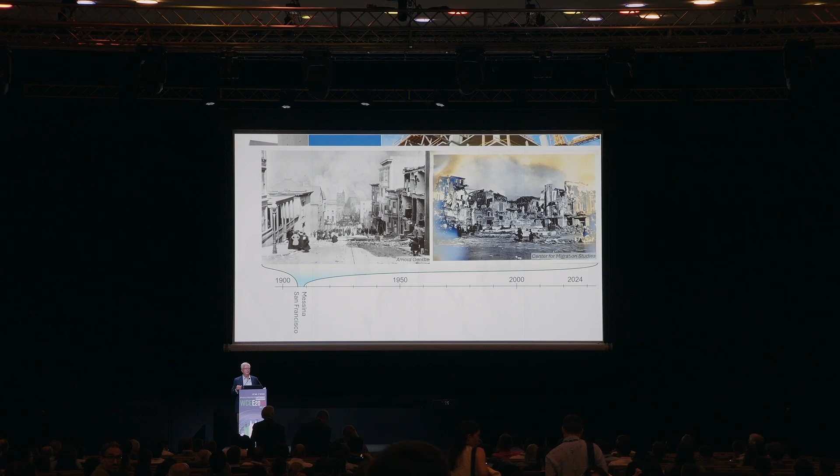First, I want to set the stage. George Housner once wrote that earthquake engineering was really a 20th century, and now a 20th and 21st century, development. And we might think about that development starting perhaps in the beginning of the 20th century with the 1906 San Francisco earthquake, partially pictured on the left. It was an earthquake of many dimensions, with lessons to be learned in seismology, geology, geotechnical and structural engineering, emergency management, and societal aspects. It was everything earthquake because of its extent.

I'd like to point out one individual, Toshikata Sano, who was sent to San Francisco by the Imperial Earthquake Investigation Commission from Japan to investigate the effects on structures. One of the interesting things he came away with, after studying overturned objects, gravestones and other things, was that it appeared, based on simple overturning static mechanics considerations, the peak ground acceleration was somewhere around 0.1 to 0.25 g. Later on, as he wrote his dissertation at the University of Tokyo, he came to the conclusion that for building design, a base shear of about 0.1 g was about right.

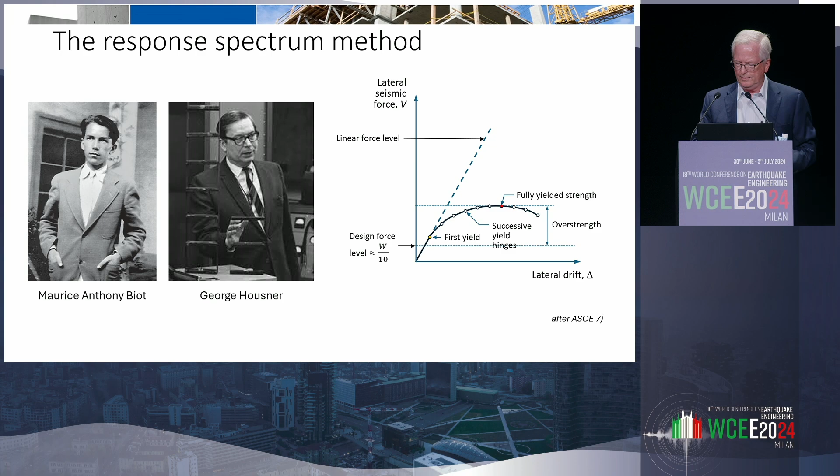Bringing this forward to where we are today, at a World Conference on Earthquake Engineering, we started the conferences on earthquake engineering in 1956. The First World Conference was held at Berkeley, and there has been a conference every 4 years since then. Throughout that period, this notion that the base shear could be somewhere around 1/10 of the weight of a structure for success has persevered as perhaps one of the longest lasting, most persistent ideas in earthquake engineering, but less and less so as we learn more and more about the subject.

Now, some interesting coincidences: 1956 was the year I was born. The first earthquake conference happened to be in Berkeley. I wasn't there then. But among the 5 easy pieces I want to talk about, the first one occurs in 1980, the year that I arrived at UC Berkeley, during the 7th World Conference on Earthquake Engineering. The other 4 pieces are listed here with some brief titles so I can identify the activities that were going on related to those things. In that 5-decade period, there are these 5 pieces that I want to talk about.

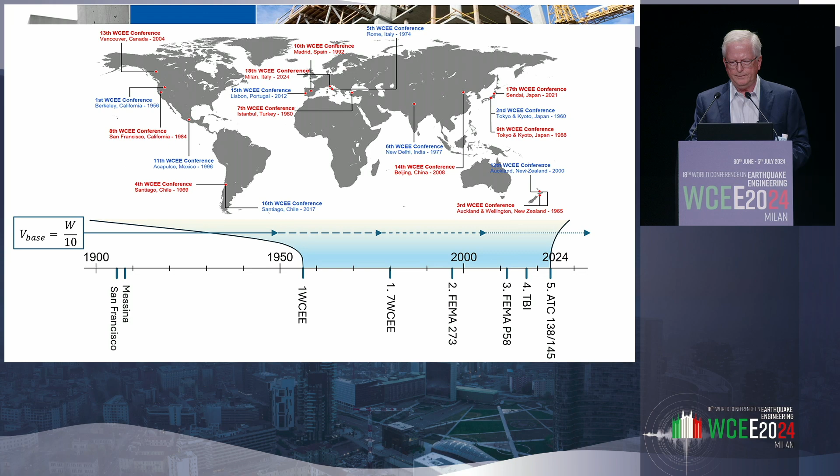So let's start on the first one. The first piece I want to talk about is displacement-based design. The paper was presented by Mete Sozen at the 7th World Conference on Earthquake Engineering, 1980. You can see a picture of the first sheet of that paper. It was titled 'Review of Earthquake Response of Reinforced Concrete Buildings with a View to Displacement Control,' or drift control, actually, that he wrote.

Pictured on the right is a photograph of a test structure on a shaking table. Professor Sozen is the handsome fellow in the middle. The fellow just to his right, the scruffy person, is me, as a graduate student. We were standing on the shaking table for a publicity purpose, to get a photograph to show what it was we were testing, what we were doing. That test model was being pulled toward the right by a cable up at the top. We were looking at the static response of the system under rather large forces. Eventually, one of these versions collapsed onto the table. They were different times—we were a little less concerned about risk on these tables.

The shaking table there was 12 feet square, or a little over 3 meters square. It moved only in one horizontal direction. It was very limited, but it became the workhorse for Professor Sozen and the way he started thinking about displacement-based design.

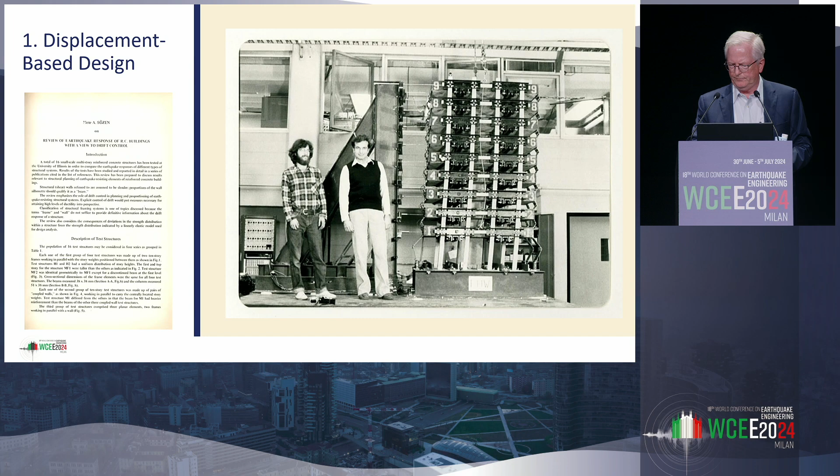Sozen tested a series of progressively more complicated structures. Here's just a small sampling of what some of these structures look like. Some of them eventually became smaller in scale, so they would fit on this small table. Sozen wisely stayed away from problems associated with bond and anchorage failure and shear failure, because those kinds of things cannot be modeled in a small scale specimen like this. But flexure is relatively safe for modeling purposes.

One of the things that Sozen wrote about in this paper was the fact that these structures cracked, yielded, they were clearly damaged, they responded in the nonlinear range of response, and yet they had characteristics very similar to response characteristics for linear structures.

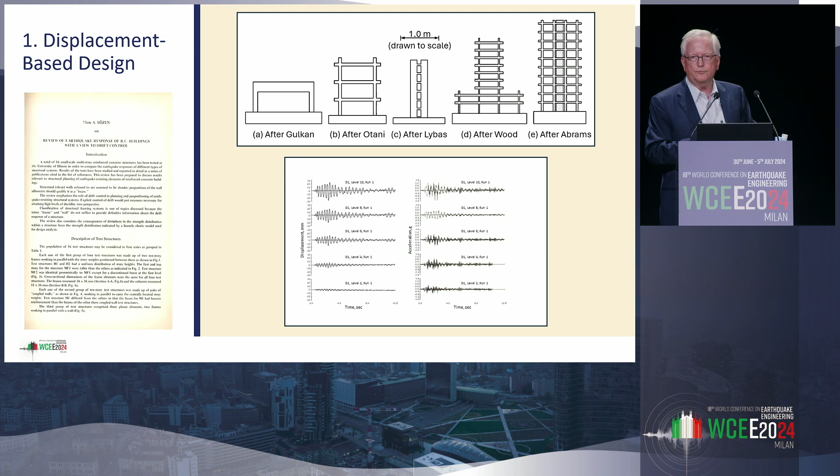If we look at a set of waveforms on the left, those are displacement histories for a test structure. The waveforms are relatively smooth, like linear structures. The displaced shape is like a first mode shape. You don't see a lot of higher mode.

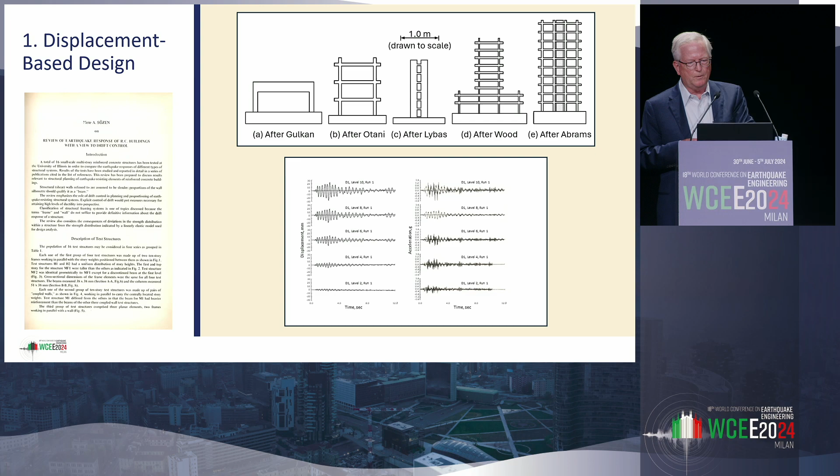Looking at acceleration responses, one can start to find similarities for multi-mode response, including the presence of nodal points and various other things. Sozen also started noticing characteristics of the drift amplitude that he could start calculating, and he was continually focusing on this idea, trying to think where it could lead.

As testing went along, this is actually a photograph from a little bit earlier, 1968, showing Sozen, the fellow standing. The fellow kneeling down on the shaking table is Shun Otani, who later had a magnificent career of his own at the University of Tokyo. The fellow to the right of the shaking table, kneeling down and looking, is Polat Gulkan, who has had a long association with the IAEE and METU in Turkey.

One of the things they got to looking at here was the load displacement hysteresis relationships of simple reinforced concrete structures on a shaking table, noticing the characteristics of the shape of the structure. Thinking in terms of the left figure about how the stiffness varied as a function of lateral drift, how that reduction in equivalent stiffness might be used to estimate drift demand through nonlinear results. On the right-hand side, some results from shaking table tests as well as sinusoidal motions, extracting what was the equivalent damping from the system as a function of the displacement ductility of the system.

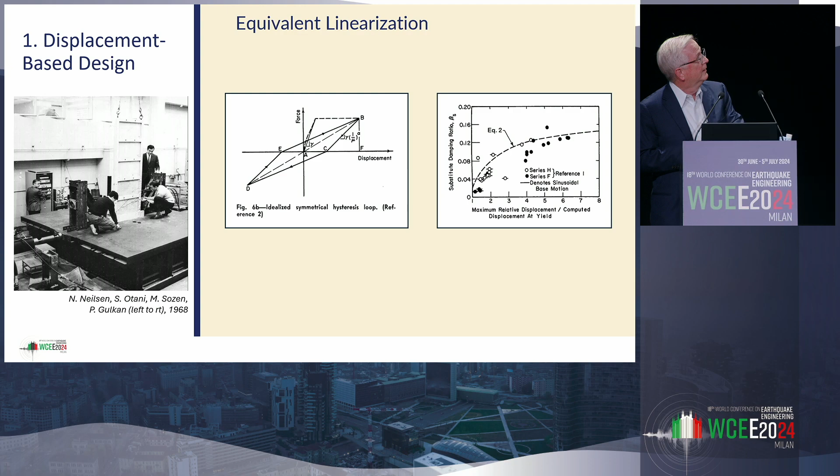This different way came out in a paper in 1973 at a workshop held by the National Science Foundation. In this paper, Sozen writes about a different approach to the earthquake-resistant design of reinforced concrete structures, and he flips the idea. Rather than using the structure and the equivalent linearized properties to estimate demand, he says, let's flip this.

Let's think about first assuming there's a tolerable displacement expressed as a multiple of the yield displacement, and you pick that displacement based on how much damage you think is acceptable. So you start with the idea that you want to control the damage, you pick the displacement, determine a reduced stiffness of the frame, step 2, find a period, find an equivalent or substitute damping based on what Gulkan had been working on, enter a linear response spectrum with the period and the damping, and get a base shear out of it.

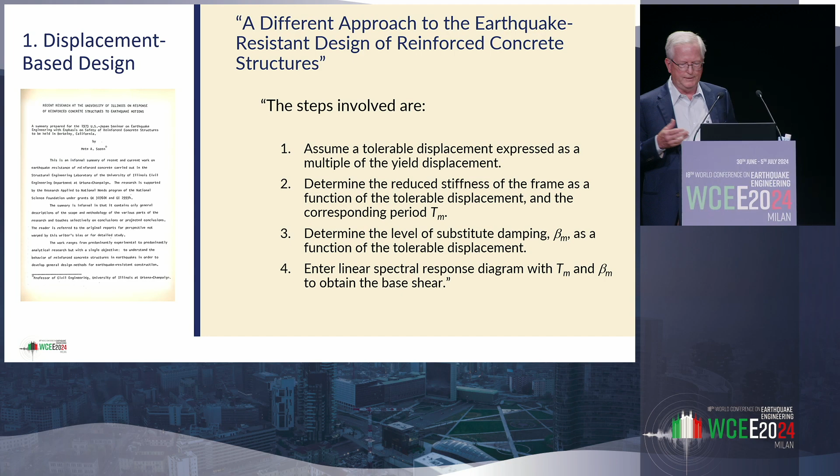He tried various schemes of this type. This eventually came out, published as work that Professor Gulkan and Sozen had in papers in the ACI Structural Journal. It entered into the thinking about a substitute structure design method. In effect, this is really the direct displacement design method—not quite the same as it might be done today, but the idea of starting with the tolerable damage and working backwards to figure out what the structure should be was a huge insight, a very different way of thinking about this problem at the time. I think it has to be attributed almost entirely to Sozen.

Now, why was Sozen interested in displacement as opposed to forces? What we had before was you get a base shear, 1/10, 1/12 of the weight of the structure, or something more complicated than that. Sozen's interest really came out of his experience in earthquake reconnaissance, looking at damage, and his experience in the laboratory looking at how damage develops in structures as they're moved.

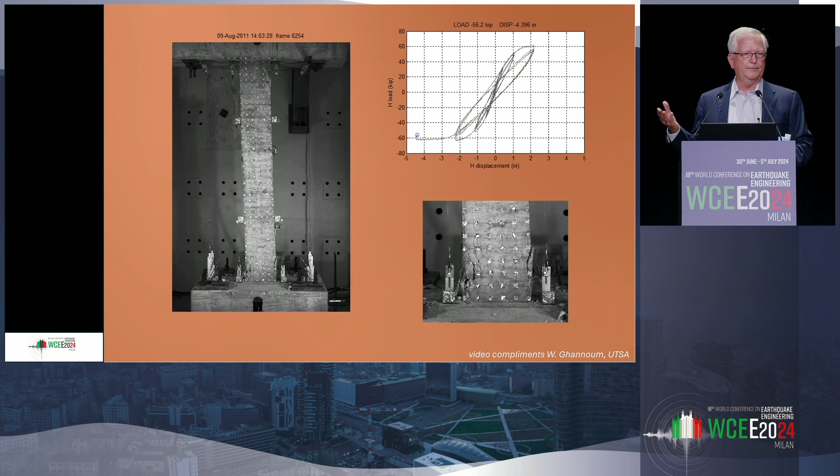Watch this video if I can get it to run. There it goes. This is a column subjected to axial force and cyclic lateral loading, effectively linear at this point, cracking, beginning to yield soon. We'll let this run a moment more. Much more extensive yielding. The force resistance of this simple column is determined by the longitudinal reinforcement, which establishes the moment strength.

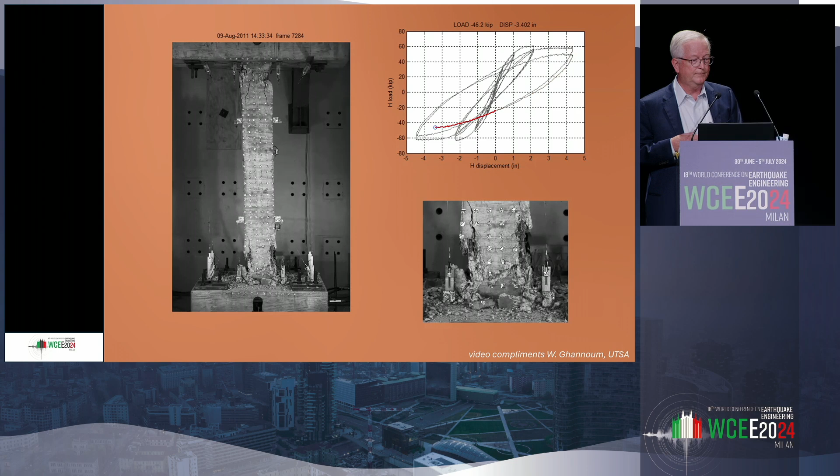Provided the structure doesn't fail in shear or bond or anchorage, and provided it's pushed into the nonlinear range, the shear force that it's going to develop is determined by the moment capacity. And it's not that shear force that fails the column. What fails the column is the deformation and the repetition of large displacement cycles that cause damage and eventually lead to failure.

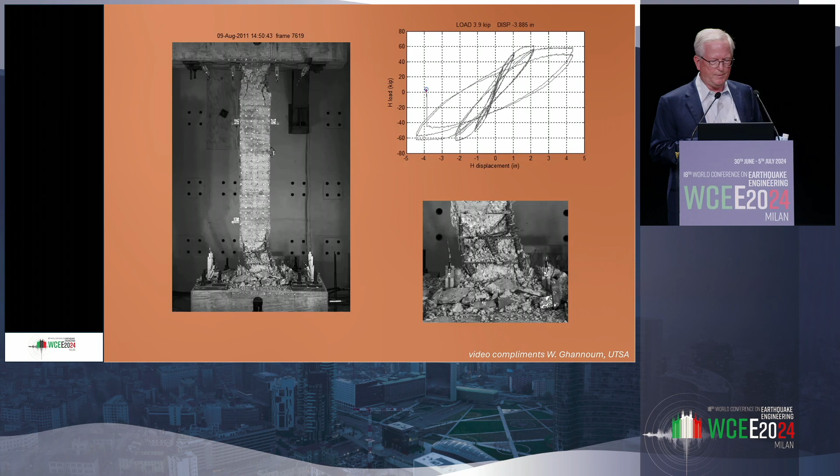Sozen's interest initially was primarily in the structure, trying to establish how to control displacement to control structural damage. He was also interested later on in the non-structural parts—how do you control non-structural damage by controlling displacement? It was a very different way of thinking about things at the time.

The drift committee, if I can find my notes here, said that safety, of course, was important when considering drift. So if you had elements that would get knocked out of place and fall on people and kill them, those had to be addressed. But beyond that, non-structural items and discomfort of occupants were not to be part of a building code because they demonstrated excessive paternalism.

Paternalism, if you're not familiar, it's a complicated English word. It more or less means excessive control by the government of things that people really should be able to decide for themselves. And so Sozen, I think, got a kick out of that statement.

He himself never, as far as I know, nailed down or specified or recommended a particular drift that you should use, but maybe a range within which to work. So he was not into setting himself up to be criticized for what he selected.

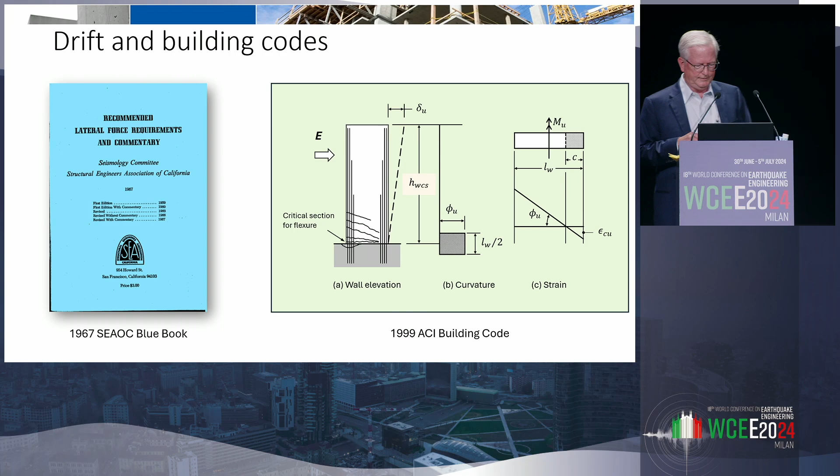I want to close on this first piece, and I could spend all day on it. But Sozen had a big team of students over many years, and I credit that team with shifting the focus from forces into displacements as a preferred means of identifying damage and design requirements. The concept of relating performance and displacement, and picking displacement as a way of deciding if a design is good, today pervades methods of performance-based earthquake engineering. And while Mete Sozen tended to disparage the notion of performance-based engineering every time I spoke with him, he really, I think, gets the credit in my book for getting us moving there. So that sets the stage that I wanted to start with.

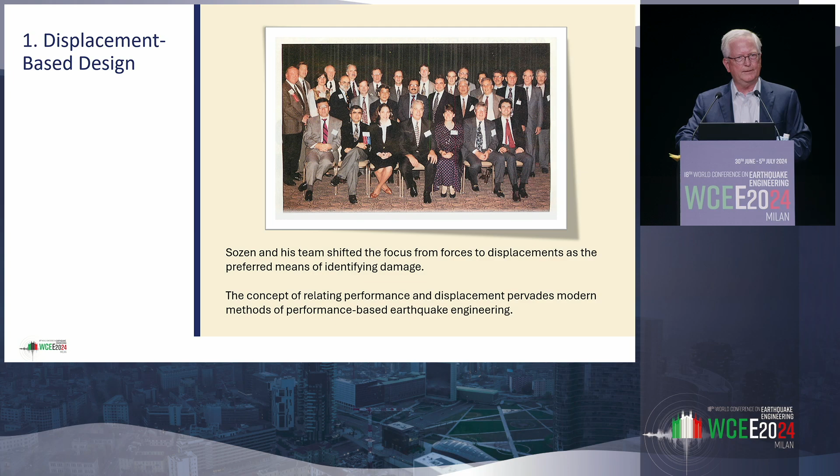The second of the 5 easy pieces is one related to existing buildings and the assessment of those buildings.

I wanted to point out first that in California, in the period of 1971 to 1994, there were many damaging earthquakes. There was a lot of shaking going on in California at that time. And those of you who are from California and young, get ready—it'll start up again sometime soon. Be prepared. But this was a very active period.

We learned from those earthquakes that most modern buildings perform reasonably well. They did what they were expected to do. They were pretty safe. But many of them sustained damage that was not adequately controlled, mainly in non-structural systems. So that was a consideration that needed more attention.

The existing building stock, on the other hand, was another story. There was a lot of damage that occurred in existing buildings at the time. Owners began to be more aware of the problem of existing buildings. Many owners contacted engineers to look at buildings and start thinking about strengthening them. The word was strengthening at the time.

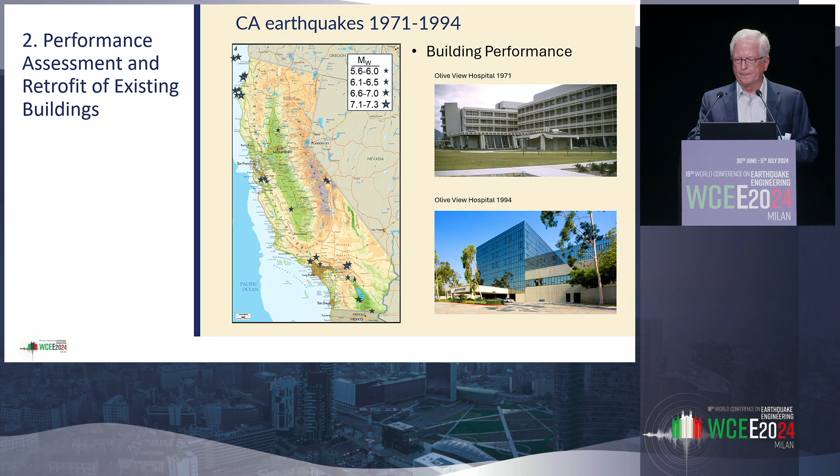Given the work that Sozen and others had been doing, there was awareness in the structural engineering community on the west coast of the US that displacement mattered. The original idea of seismic strengthening was that if the strength was less than about 3/4 of what the modern building code required, you added more strength to get it up to that minimum level. The thinking began to change around the early 1990s toward displacement-based ways of controlling damage.

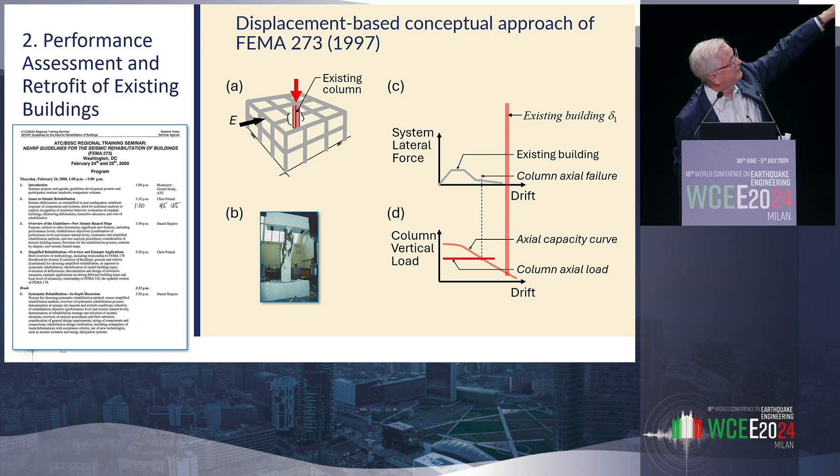We've got that vulnerable column. The lateral force resisting system is weak—it doesn't provide enough resistance to control displacements. In D, the column may be pushed beyond its shear capacity, or beyond a capacity where it can continue to support vertical loads. The key to retrofitting, in providing a supplementary system, is to bring the drift back.

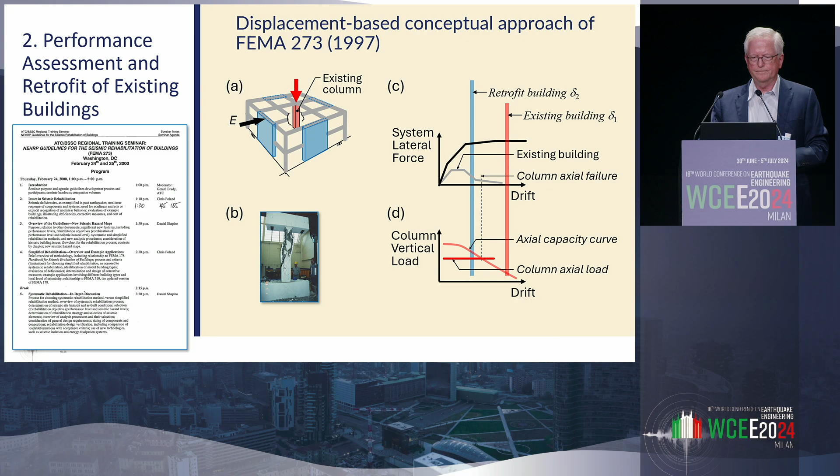This seems routine today, but in 1991 or '92, this was not routine. This was not the usual way of thinking about retrofitting, repairing, and rehabilitating buildings.

FEMA, the Federal Emergency Management Agency, recognized the issues of existing buildings and started a program in the 1980s that really kicked off with the development of a document, FEMA 273, with a set of guidelines for the seismic retrofitting of existing buildings. Here are some of the key team members involved in the project—many of them I think of as real masters of earthquake engineering who deserve to be invited soon to this stage.

Ron Hamburger, in one of the presentations early on in the project, presented this slide during a talk at an East Coast university. This slide became the poster child, in a sense, for the project, and it shows a number of interesting things. One was the notion that there would be multiple performance objectives that one could choose.

One could choose something related to a 25-year shaking level and a different performance level, versus a 2,500-year return period, for which you might consider being on the verge of collapse. So this idea of performance objectives, with both demand and performance level considered, was kind of new.

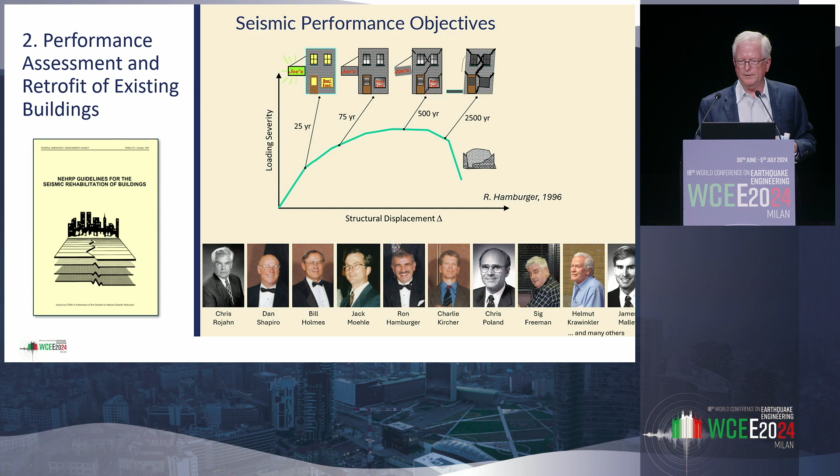The response is definitely non-linear, which was fairly new at the time. And the idea of being very visual in presenting these different objectives, so you could explain to property owners who wanted to know what they were getting when they asked what they'd get for the amount of retrofitting being proposed, was very important.

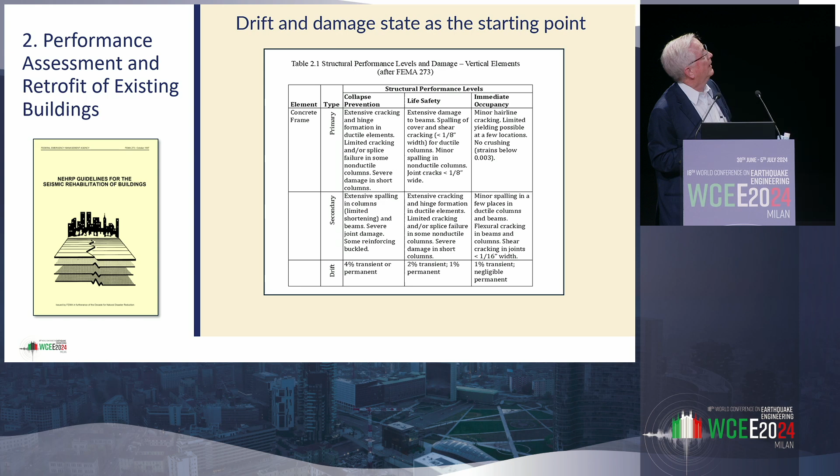I think for the first time, this committee went to work on trying to define what each of those limit states really was about. Shown here is part of one of the tables from the FEMA 273 document. For concrete frames, if they're a primary part of the lateral force resisting system—meaning they're supposed to resist the earthquake shaking primarily—for collapse prevention, life safety, etc., this is what that team decided was the right set of performance levels and how to describe them.

Once the levels were described, the team had to select ways of delivering a building that would achieve that. So there was discussion and provisions developed related to global modeling, how to do a global model. For the first time in US practice, there was very explicit consideration not only of linear modeling, but non-linear modeling and analysis methods, both static and dynamic.

For each component type, models had to be developed and described. You had to understand the deformation limits and criteria needed. And for each of those components, criteria were needed to help define whether they were force controlled—unable to yield without failure—or deformation controlled, meaning they had the capacity to deform non-linearly without failing.

For those different kinds of components, criteria were needed for strength, for stiffness, and something totally new for the time: how to define the deformation capacity of a component that's yielding. A totally new thing.

Not that we didn't know it was needed, but we didn't ever have criteria for that. Now I want to pause for a moment and reflect on the fact that this had a huge impact on practice, on research, and on computer software development. Computer software development—we needed software that could do this kind of work, and the software companies stepped up and delivered that. We needed to understand criteria for...

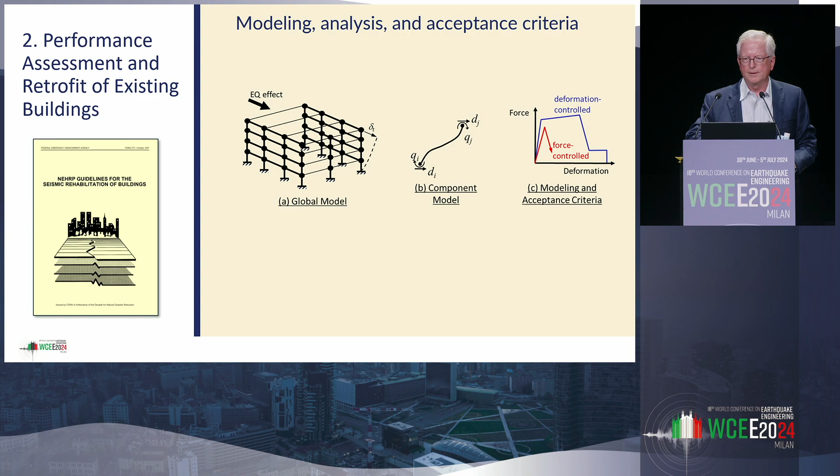These procedures were very widely used. The Berkeley campus is one example of sort of a retrofitting museum, so to speak. But we can find structures all over the United States that have been retrofitted by these procedures, and we think they've been very effective.

One thing I didn't mention is that while we had performance objectives, they were really notional, in the sense that we could state a life safety criterion, but we didn't actually calculate a risk of not achieving that criterion. That was just too much to do at the time, and more time and more research was needed to take that next step.

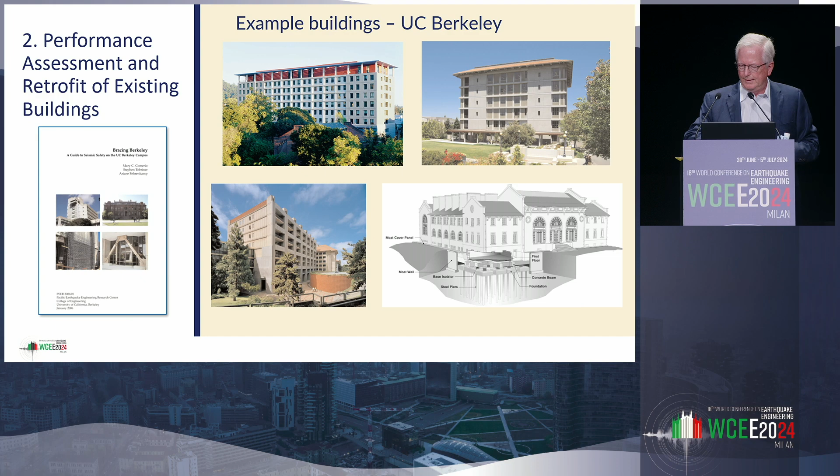And that gets me to my third piece in the five easy pieces. Right about the end of the development of FEMA 273, it was apparent that we needed risk-based procedures.

We know that there's uncertainty in earthquake ground motion, in structural response, in the occurrence of damage, in the amount of time it takes to fix damage, and so forth. But it was a huge undertaking to figure out how to do that.

We adopted Ron Hamburger's cartoon, updated the structure a little bit so we could call it our own in the Pacific Earthquake Engineering Research Center. Bill Holmes from Rutherford and Chekene came to one of our research meetings and gave a presentation and told us we needed a performance engine that would be able to calculate not just serviceability states and life safety states and so forth, but would be able to tell us the cost for repair, the casualty rates, and the downtime.

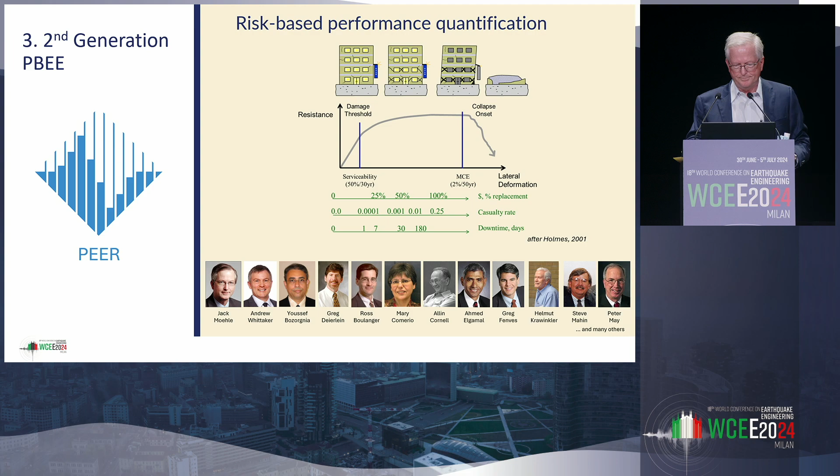We had no idea how to do it in the Earthquake Center, but we had really good people to work with. For example, Helmut Krawinkler and Allin Cornell from Stanford University took on the task of trying to figure out how to formulate this notion of performance—how to actually do a calculation that put all the uncertainties together mathematically and enabled us to calculate the risk of repair, of cost, et cetera.

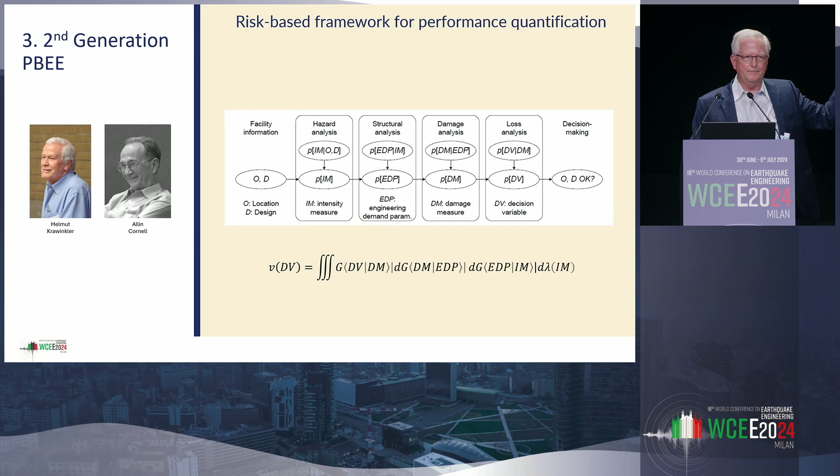Many practicing engineers looked at this and said, 'You've got to be kidding. No way are we going to do anything like that. You academics are nuts.' Peter May, who was a social scientist, looked at the equation and said, 'You're oversimplifying the problem.' And Peter was right. Solving the equation isn't easy, but we figured out ways to do it.

One of the ways it was solved was done in a little project with Tony Yang. I think Tony is here somewhere in the audience.

We were working on trying to figure out a practical way to do the integrations and essentially set up a Monte Carlo scheme. The idea was that given a facility, you did a hazard analysis, you selected some ground motions to represent the hazard, you input them into the structural model, calculated engineering demand parameters like drift and acceleration.

You determined damage from that using a fragility relationship. How does damage of an infill, for example, relate to story drift? You would then do this in a Monte Carlo study thousands of times so you could characterize the distributions of the results. No way you could do it because just the nonlinear analysis at the time, and still today, takes too much computational time, and dealing with the results is just too difficult.

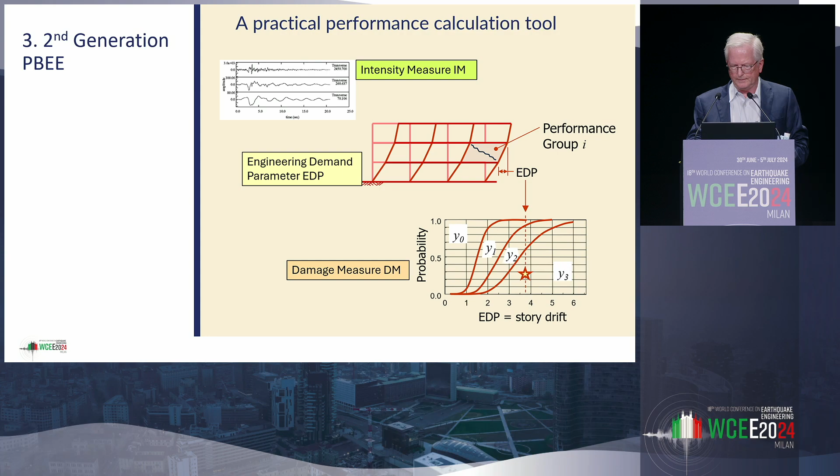So what we schemed was a technique where we did it a finite number of times, a smaller number of times, collected all the engineering demand parameters that were of interest. In this example, we did a 3-story building. We just did 11 ground motions at each of several hazard levels.

And then we collected from that displacements, accelerations, and maybe base shears. And then we looked at that matrix and figured out what was the mean vector for each of those demand parameters, the standard deviation for each one of those, what was the correlation coefficient matrix like.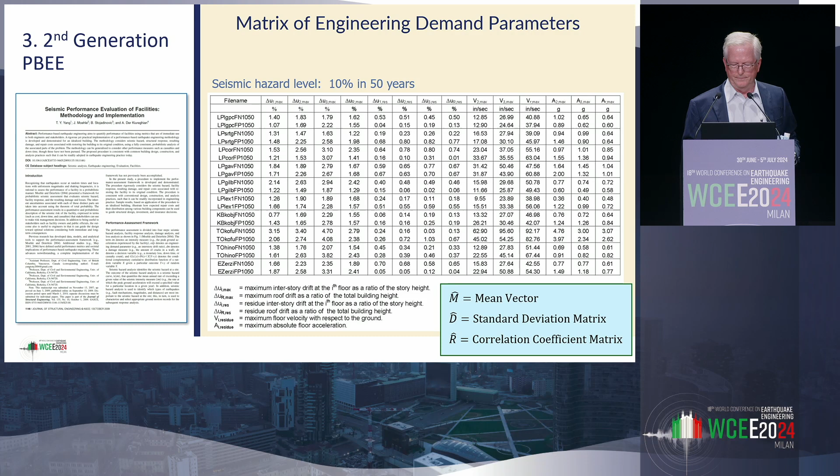So we could mathematically derive through an inverse process a series of demands that was statistically consistent with the results that we got from the nonlinear dynamic analysis. And so we could simulate mathematically the results that we were getting from nonlinear response history analyses. And here's a sampling, here's 10 sample realizations of using a process like this.

The nonlinear analysis could take an hour per run. This took a fraction of a second to do 100 of them. And so with something like this, we could develop realizations of what the earthquake demands were.

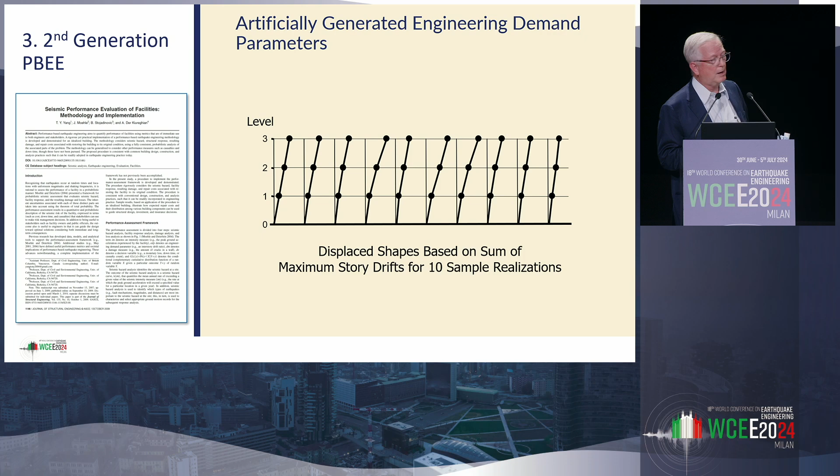And given those realizations, we would be able to do damage calculations, do loss calculations, et cetera, in a probabilistic way, taking all the uncertainties into account, and do it fast.

And in this process, we could do things like calculate the probability of certain repair costs given an input motion. So here's some essentially fragility curves for cost. We could integrate those things and get what was an annual rate of exceeding a total repair cost, and take an area underneath that thing and get a mean cumulative annual total repair cost for a building.

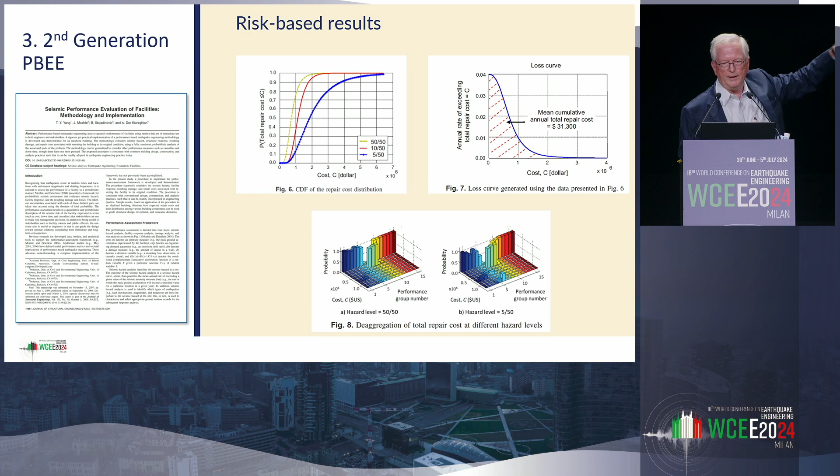Or you could look statistically at how individual components of the building were doing and find out which components of the building were being more heavily damaged than others, and try to find ways of changing the structure, changing the clearances so that you could reduce those losses that were causing most of the cost. It was a fascinating exercise. It was fun to develop and get it to actually work.

This procedure was being developed by the Earthquake Center at the same time that FEMA was involved in another project, which was the FEMA P58 project, to develop the data necessary to determine what the losses were for a building of any general type, with multiple building types being considered at the time.

So there was a big team that worked on this, marvelous people to work with, developing definitions of what buildings were, what were the demand parameters you needed to work on. For each one of those components in a building, what kinds of damage could occur, at what drift levels did they occur, or acceleration levels if they were acceleration sensitive.

What did they look like? What would it cost to repair them? How much time would it take to repair them? And when the information was all assembled with this performance calculation engine that we built at Bill Holmes's suggestion, you could put together almost anything on performance output.

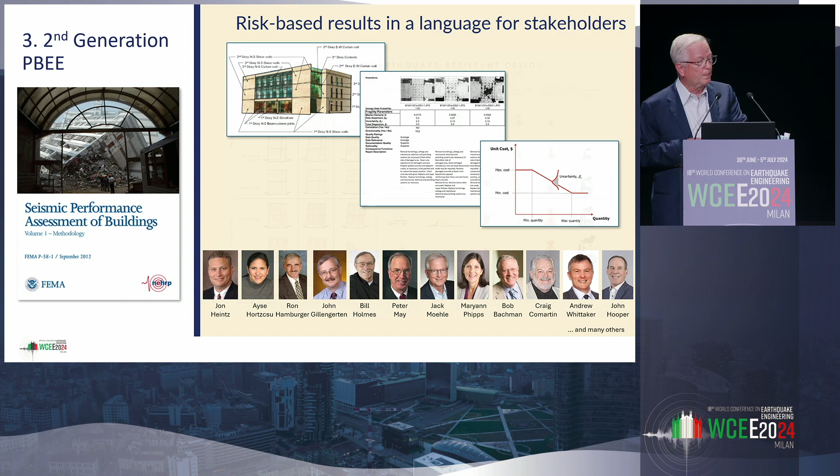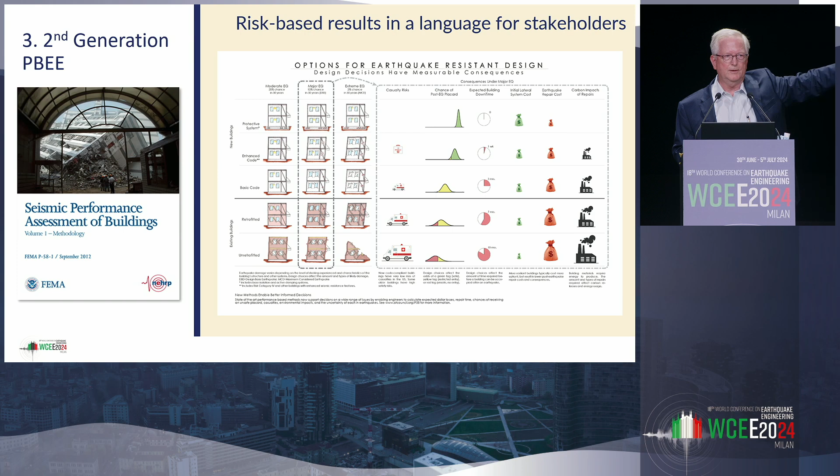And as we were getting toward the end of the project, FEMA says you've got to include environmental costs as well. And once you've got the engine and you start inputting the data, creating fragility relations for all the things you need, this becomes kind of routine.

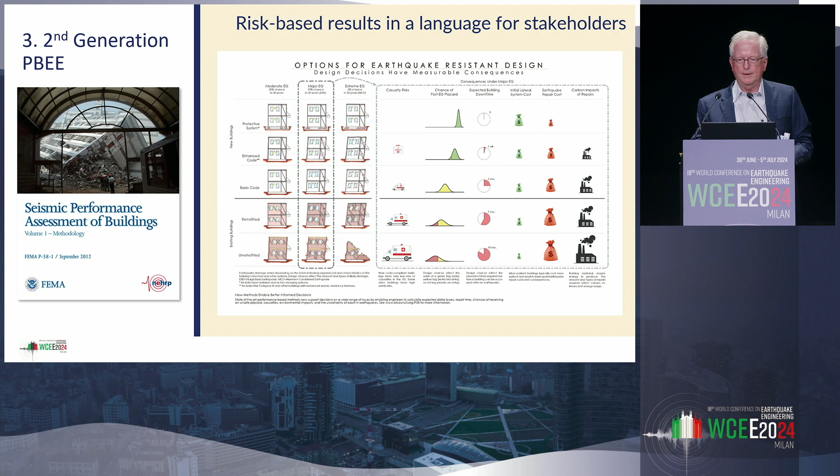So this was really the third, in my view, the third big piece in performance-based earthquake engineering: being able to quantify the risk of being in different damage levels. Now, once we had things like this,

we started working on the problem of design of tall buildings. And there are many other types of buildings that could have been pursued, but there was a particular interest in California and throughout the West Coast at the time in pursuing taller buildings that were a little different from buildings that had been designed before.

And they were outside the requirements of the code, the restrictions of the code. And so something different was needed.

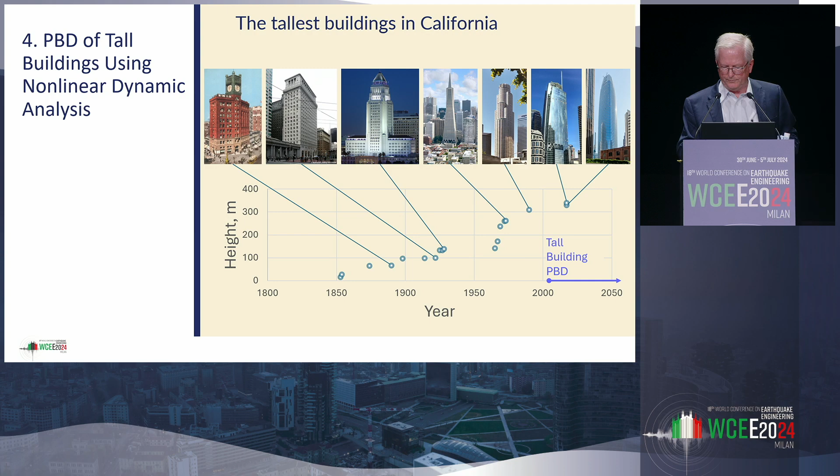The new building generation had different kinds of framing systems, odd geometries and cladding. There were combinations of structural systems within the building that just didn't match anything within the building code, and so we needed a performance-based approach.

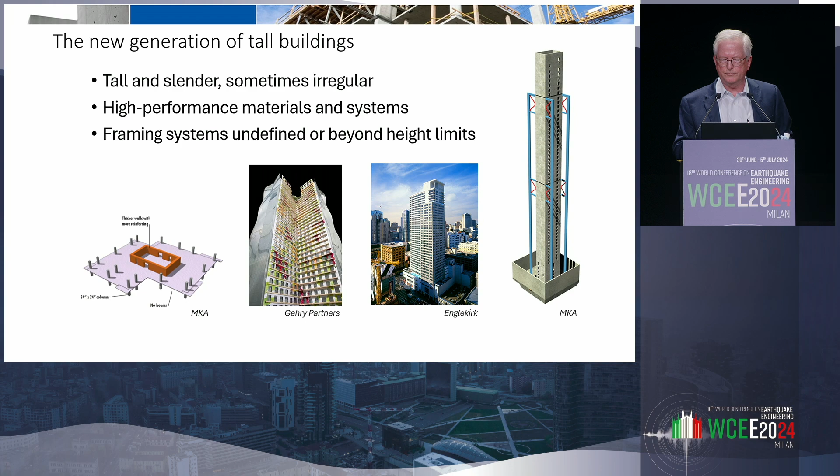Lots of studies were done to try and figure out how to do this. Time doesn't permit going into many of them, but one of the little studies that was done was to do sample designs by practicing engineers of different structural systems and design them by different methods to see what the output was. This example is looking at a 42-story tall reinforced concrete dual system compared with a 42-story reinforced concrete core-only system.

If you designed a core-only system in California at the time, you could only go up to about 15 stories or so. This is going way beyond that, and this then requires a design by a performance-based method. These were designed by two different design concepts: the code as it existed at the time, and then a concept we had, a notion of a design guideline that would allow us to carry out the design outside the code.

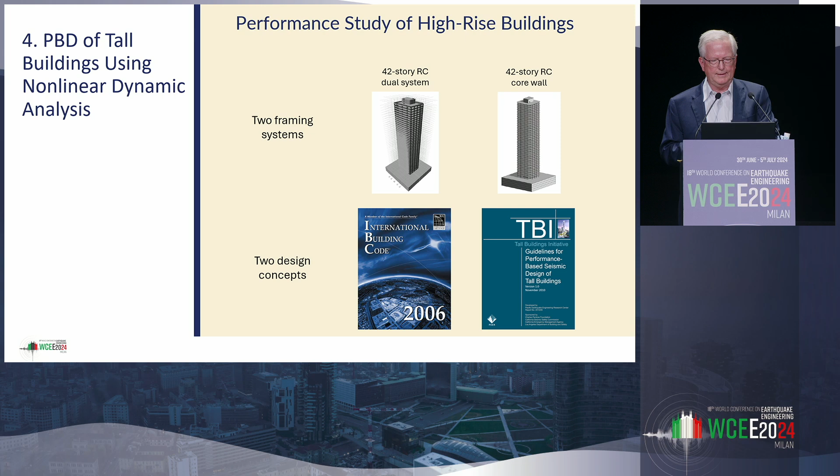Quick to the results. These two systems were designed two different ways. There's the initial cost in accordance with a real cost estimator. And below that was a calculation with this performance tool of what the losses were that we would calculate for each of these buildings.

The base cost, if we were designing only by the code required system, we would have the dual system code design at $149 million US at the time. If we could shift to the performance-based design, we could go to a core wall and it would be a little bit less expensive. But it was something that we could design. It wasn't more expensive, and it had other attributes in terms of functionality that developers were interested in.

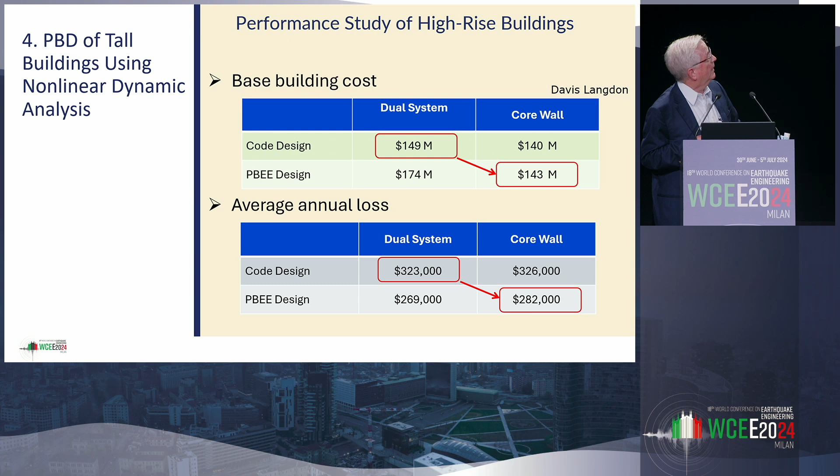In terms of average losses, compare the two: $323,000 calculated for the dual system by the code prescriptive design, with less losses for the core wall system. A lot of this had to do with the losses because of the drift demands on flat plates, but also the shear demands that we would calculate on the core wall system.

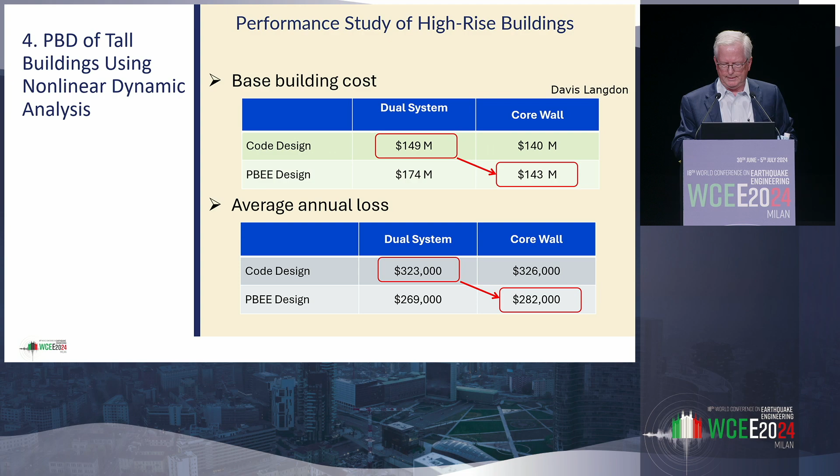So with this in place, what was done was to start the process of writing a guideline that could be used by practicing engineers to implement this for the design of multiple buildings. Farzad, I'm very sorry, I had limited time tonight. I can only talk about the tall buildings guideline and not the LA tall buildings guideline, but there's an equivalent, almost equivalent document in Southern California that gets used.

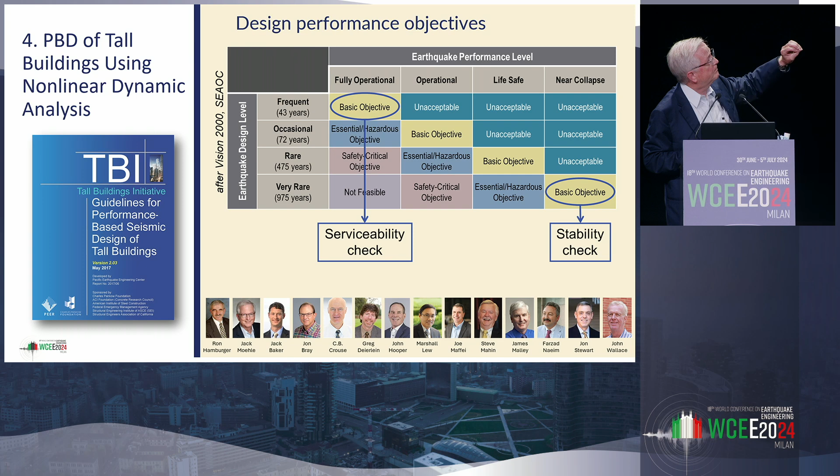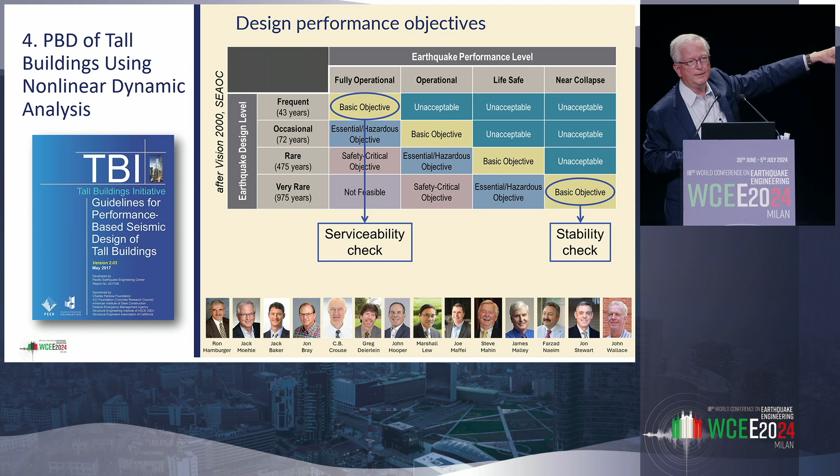It was decided pretty widely within the state that the best way to do the design was by picking a set of objectives for performance: a serviceability check for frequent earthquakes, and a stability check for something that was a very rare shaking level.

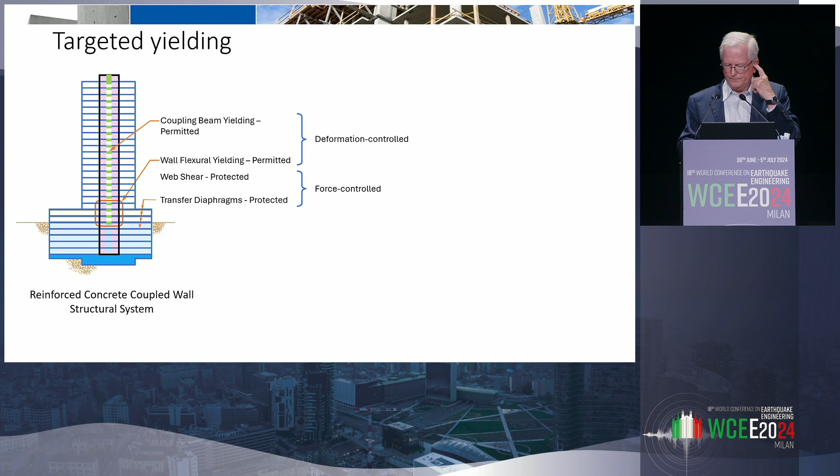The design methods that were used involved specifying that you picked targeted yielding locations and locations that you protected from yielding. The structure was to be analyzed in certain ways with guidance provided on how to do the analysis and what had to be modeled.

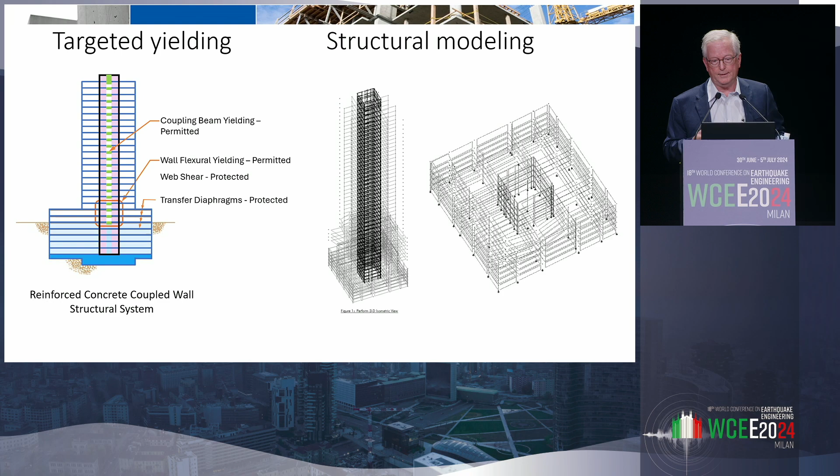There were acceptance criteria developed, and the criteria are a little different in the two different documents I mentioned. But what was typically done is run a series of earthquake ground motions through a model of the building, check drift ratios, deformations in certain deformation-controlled elements like coupling beams, check strain limits against your modeling ability, and then for certain force-controlled elements, make sure that the forces stayed below what the force capacities were.

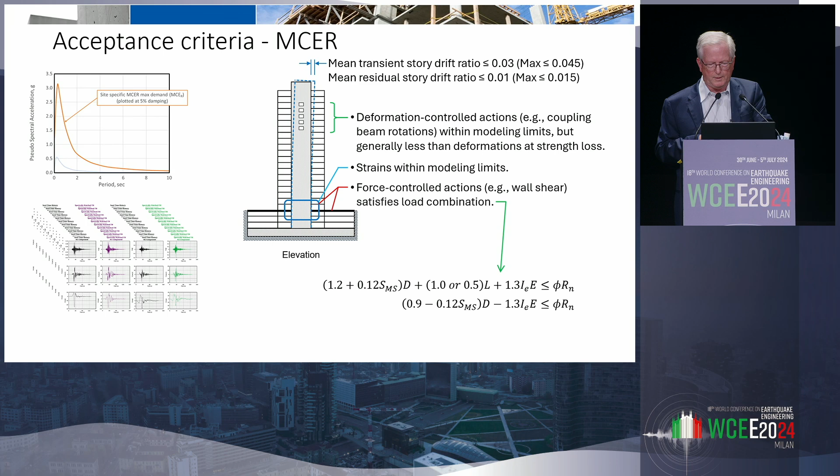And for those elements, there were load combinations that were developed that were intended to achieve the performance objectives stated in our building code: 10% or less probability of collapse in a maximum considered earthquake condition. And the materials code stepped up and developed resistance and strength reduction factors to fill in on the right side of these equations.

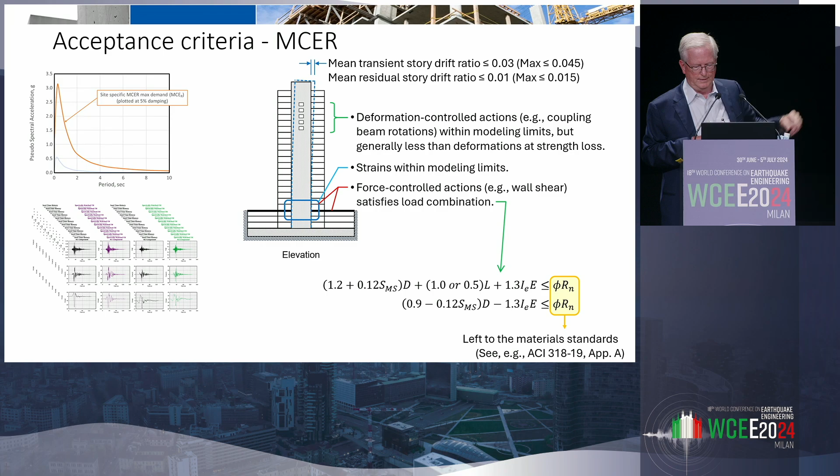These methods were used in many buildings up and down the west coast of the United States. I served on several of the peer review panels and started collecting data quietly on how each of these was performing, at least according to the calculations under nonlinear dynamic analysis.

Story drift under service level earthquakes was pretty small for the most part. Under maximum considered earthquake, the maximum of the mean drifts never got above 3%. It's pretty high though, but 3%. Residual story drifts were generally pretty low because they're core walls.

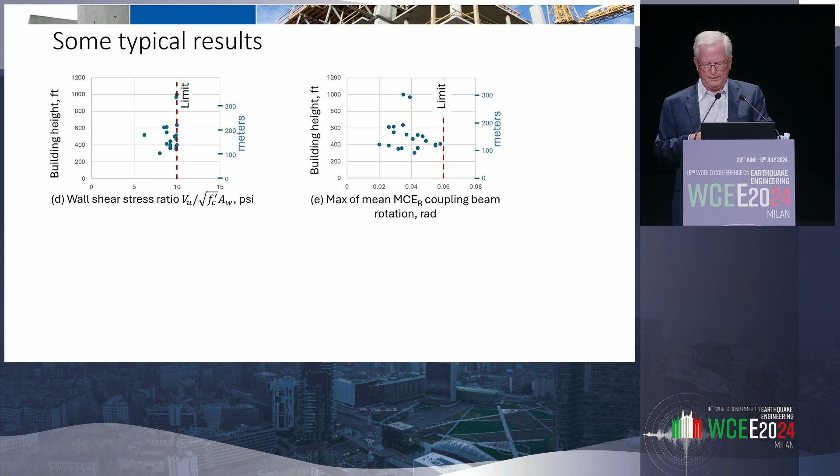Shears on the walls are the item that oftentimes control the design of these buildings. They get pushed up toward what we had established as a shear limit at the time. And then the rotation of the coupling beams can be a controlling factor because the beams are constrained within the rotating walls. John Wallace provided some test results from UCLA based on Pankow Foundation testing to show what these things would look like given that level of shaking.

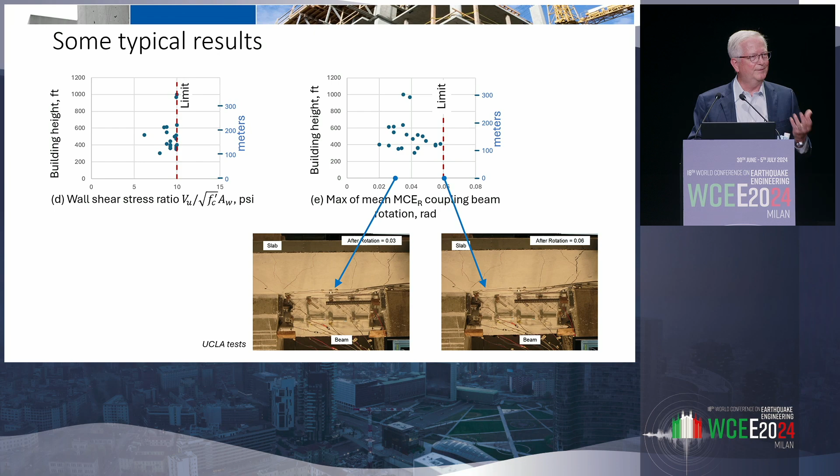It was reasonable, at least within performance states that was considered non-collapse. We generally felt good about this process because we were providing a means to design buildings in a way that was considered effective, efficient, met performance objectives, and provided reasonable assurance for the occupants of these buildings that they could work and live and play in their urban centers.

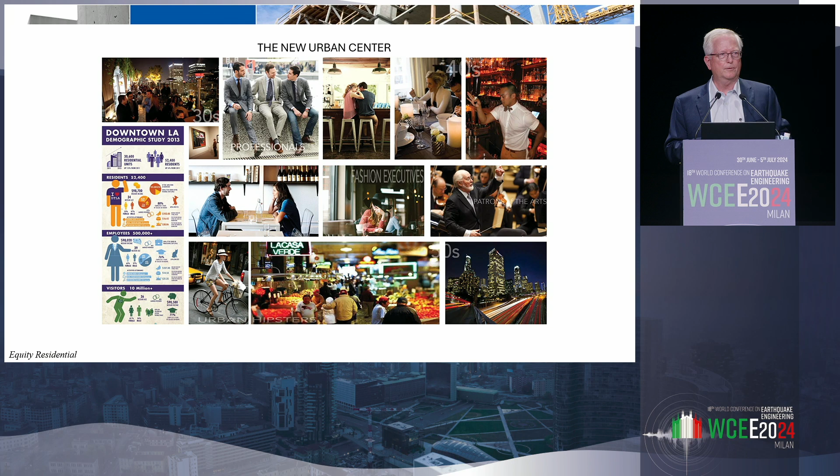But one thing we really never checked for these buildings was whether their performance really met the societal expectations. I think it's an area that we need to do some work, and that's my last piece, which is what I want to chat about.

This slide concept comes from something Professor Ken Elwood presented as part of his 2023 EERI Distinguished Lecture. Ken had been in Christchurch, New Zealand when this earthquake occurred and felt that the amount of loss, the damage, the downtime, the overall expenses associated with this earthquake were way beyond what societal expectations should be. In his 2023 distinguished lecture, he proposed that there should be a consideration of repairability as part of the process.

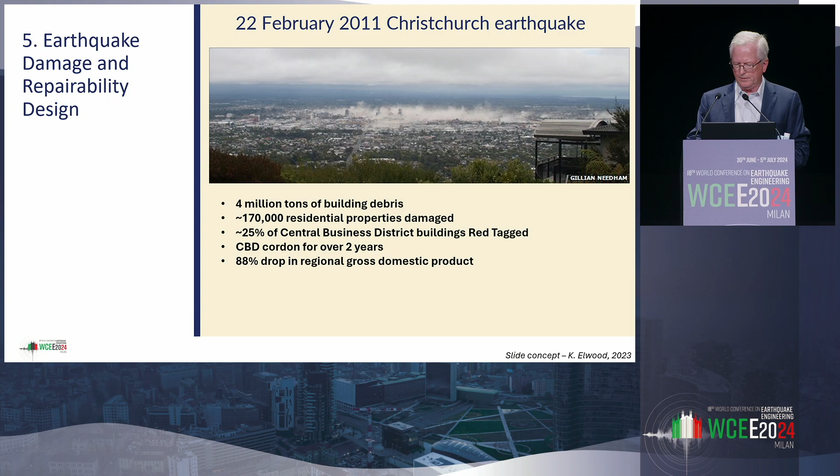This idea that buildings should be repairable, that communities should be functional, I think is the next step and the ongoing step in performance-based earthquake engineering. I want to spend just a few minutes on this.

There is a project, another ATC project funded by FEMA, addressing this notion of functional recovery for our communities. There is a flow chart that identifies multiple states. In the interest of time, I'll just focus on building safety, but there are other aspects of functional recovery.

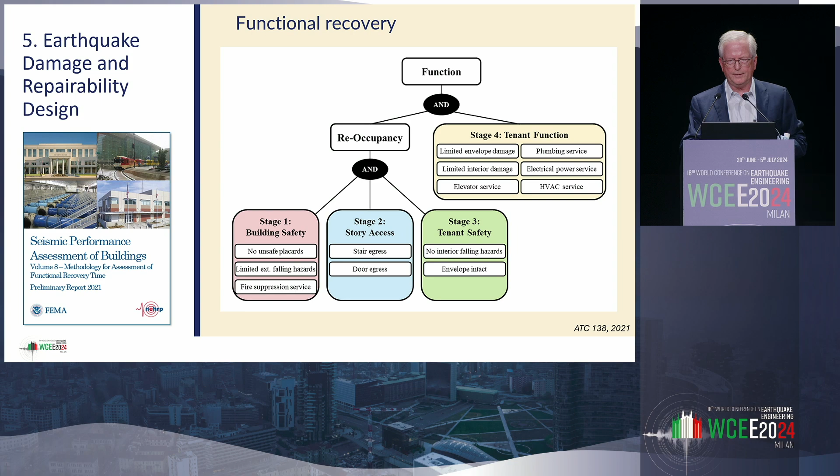As part of this focus on building safety, one needs to be sure that a structure is at a point where it's safe to occupy. It doesn't have what we would call a safety critical damage state that would make the building suspect for being unable to perform again in an earthquake.

There's a different FEMA-funded project that ATC is in the middle of with this cast of characters that has defined something referred to as safety critical damage. Safety critical damage, by this document, is damage corresponding to the point where strength degradation begins to occur—this point, DS2, up here.

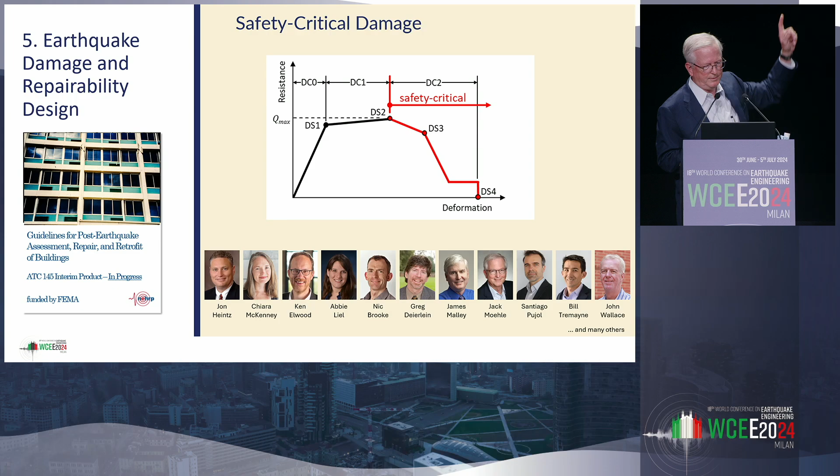This is based on multiple considerations and data. Shown here are some results in a paper by Opabola and others from 2023 looking at the lateral force displacement response of reinforced concrete components designed to be ductile, without shear, bond, or anchorage failures. One thing commonly observed—look at the left figure—is that the point where strength degradation begins commonly corresponds to the point where longitudinal reinforcement buckling commences.

It makes some sense. When a bar begins to buckle, the buckling results in very large strain in the longitudinal reinforcement. That results in low cycle fatigue damage that may fracture the bar. The buckling process results in a loss of confinement of the core, and it results in softening of the core where that buckling is occurring. That causes localization of damage under further cycling, and once the localization happens, the strength decay is usually quick to follow.

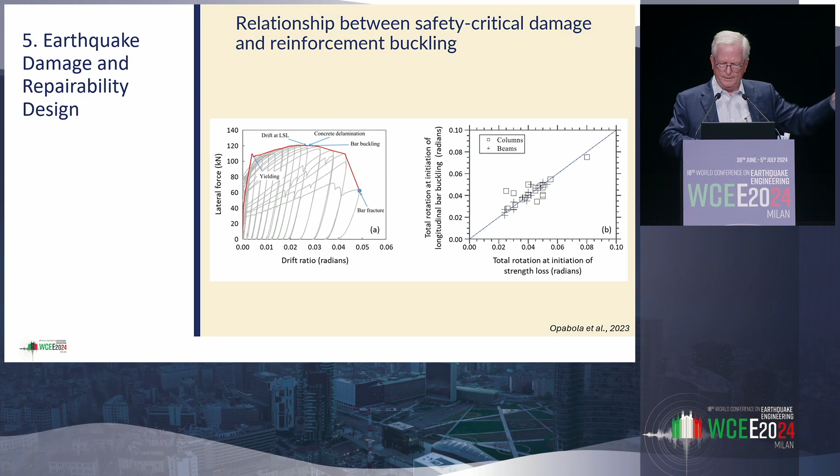And we found this fairly consistently for columns, beams, and structural walls. Some of the data are shown there, not all.

We've also looked at results, for example, from Kawashima and Koyama, which look at identical test columns subjected to different numbers of cycles. As we get up to 4 delta Y, there's no strength loss—whether there's 3 or 10 cycles up to then doesn't seem to matter. But once you get past the point where strength loss occurs, the amount of cycling matters and the strength decay accelerates, and the appearance of the damage is notably different.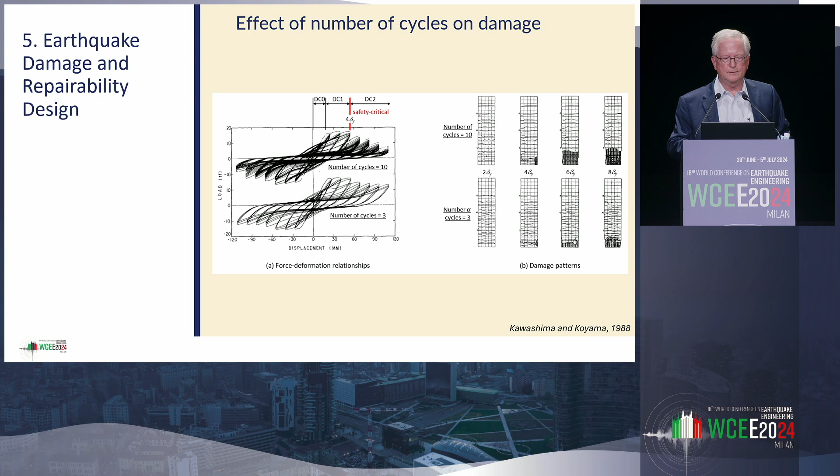But prior to that point where safety critical damage occurs, things seem fairly stable. Not only does a structure need to have component response that's very stable, but the dynamics of the building have to be stable as well.

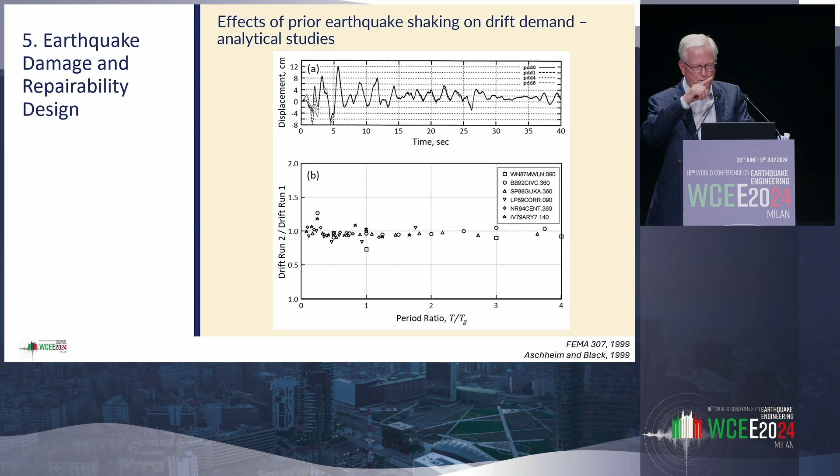There have been studies—in the interest of time, I'll skip this one—work by Aschheim and Black that was very interesting. But other studies done by the ATC 145 team and some of the students working on that project were to collect data from shaking table experiments.

These data look at shaking table experiments of reinforced concrete ductile systems subjected to 2 earthquake runs, and sometimes even runs in between those 2 earthquake runs. They include single-story to 10-story, and moderate scale structures to full-scale structures on the E-defense system in Japan.

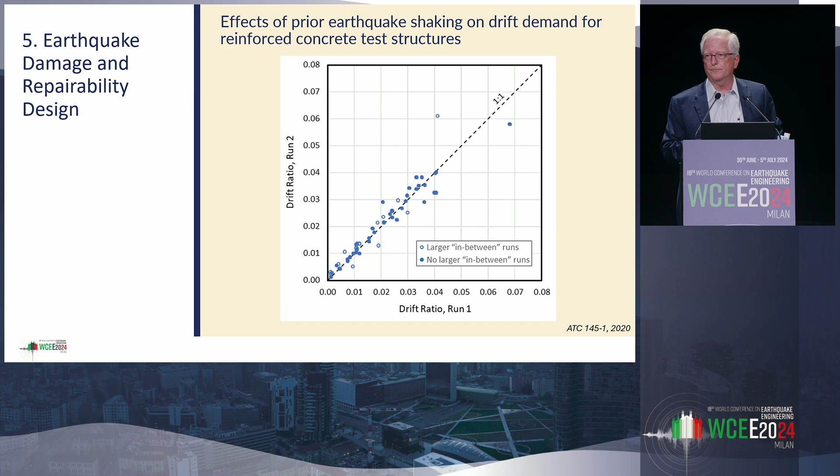Notably, the repeatability of the structure response—the ratio between the drift in a second run divided by the drift in a first run—is remarkably consistent, provided you don't push the building past a certain drift level and past the point where safety critical damage occurs.

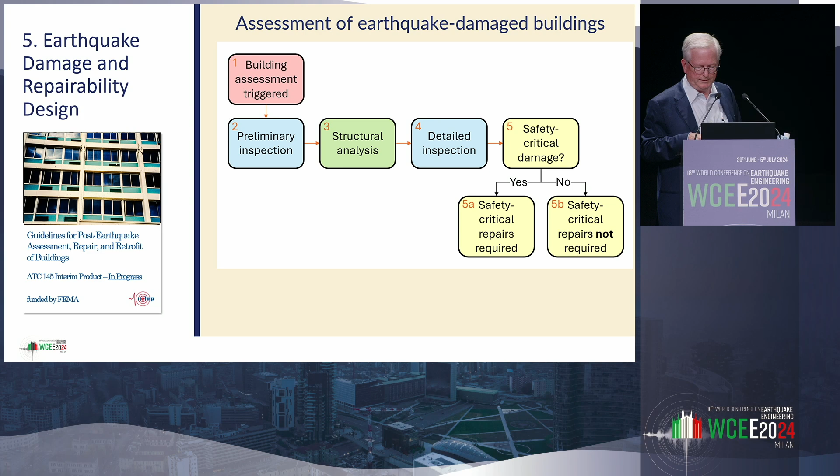This idea is built into a draft methodology for doing inspection on a building. I'll avoid the details of that. But it's also been suggested by Opabola and Elwood, who may be here, that this idea could be used as a way to do design of a building.

The idea is you pick seismic hazard, do preliminary proportioning, do structural analysis, examine whether the safety critical damage is likely based on that result. If yes, reproportion things. If not, go to the structural detailing and document preparation.

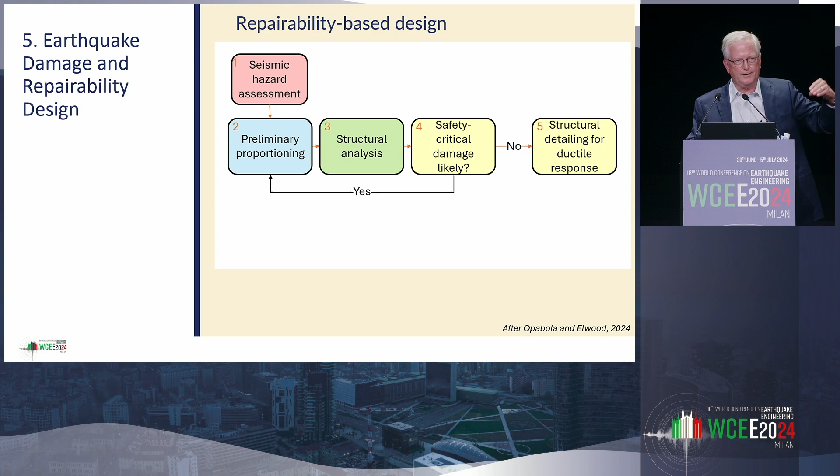Now, this is a very simple flow chart. You have to understand, of course, that there's a lot of uncertainty in all the things we deal with in earthquake engineering, and so there's a lot of complexity built into the process under the covers here that I'm not showing. But they've run some examples.

Here I pull out just 2 examples from a paper they recently published in Earthquake Spectra: some 5-story reinforced concrete perimeter moment frames, a conventional design BR 3.0 designed by the New Zealand code, and a damage control design BR 2.0 with some upsizing of components to meet acceptance criteria for beam rotations such that it's less likely to have safety critical damage.

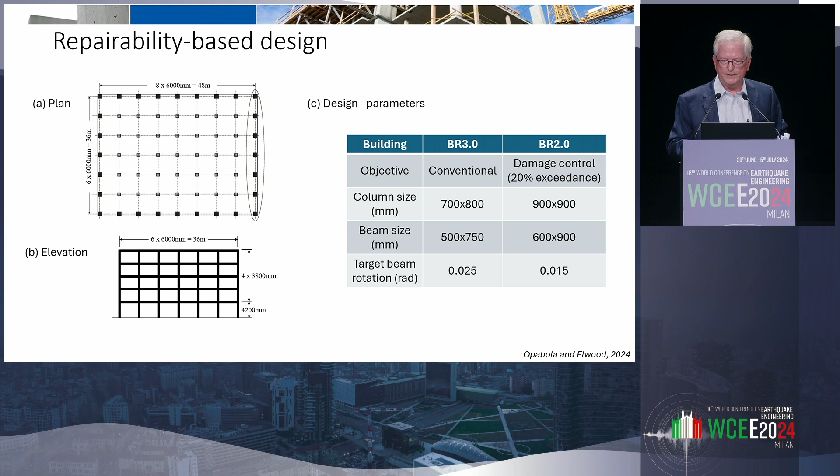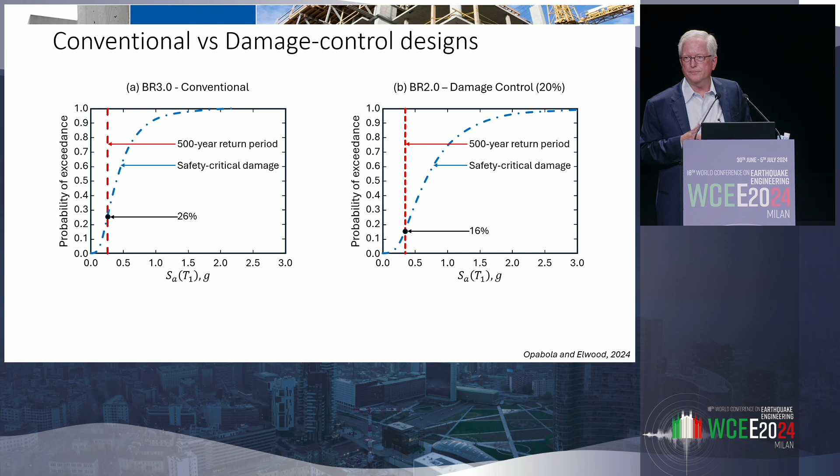It's interesting that one can theoretically control the resulting damage, and the method seems to work fairly well. It's a little disconcerting that if you wanted to get even higher safety and reliability than just 16%, you'd have to go to quite a more stout or a completely different structural system to get it to work.

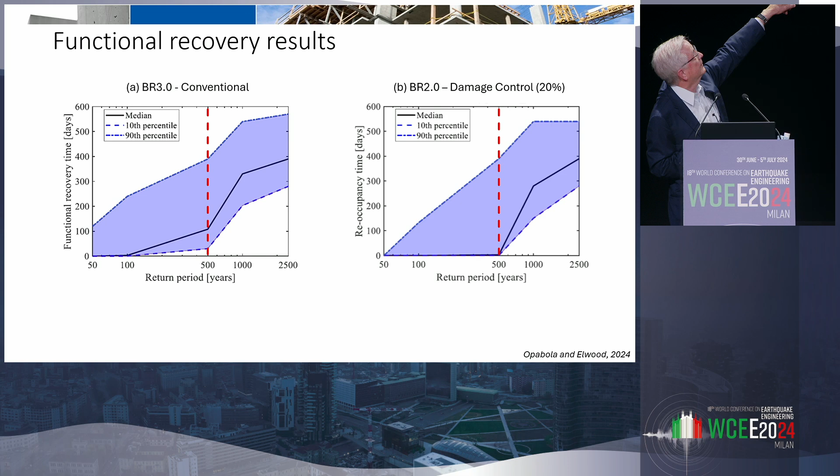They've also looked at some functional recovery results for the two different designs. In terms of functional recovery time under the 500-year return period shaking level, it's about 100 days for the conventional design that they looked at, 0 days for the other. It's one example of one building archetype with two different sizing options.

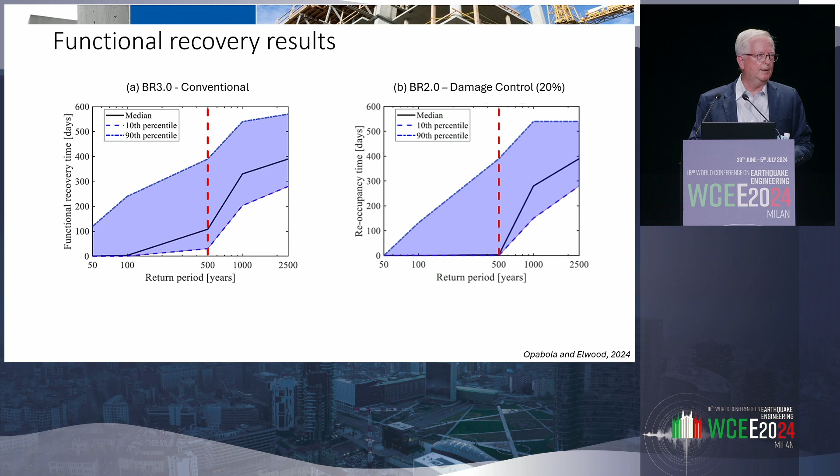More study of this type is needed to understand how to design an individual building and how to approach the recovery of entire regions. Closing thoughts, and then I'll finish.

I presented this talk in sort of 5 high-level pieces of performance-based engineering. The first, I consider as kind of the father of performance-based earthquake engineering—the person who got us thinking about deformations and what damage is and how to focus on damage as a process. So Professor Sozen there.

We talked about the idea that performance-based retrofit in the US was driven by societal needs at a time when we had many earthquakes, and how this really game-changing project developed nonlinear methods, focused the design method on displacement, came up with criteria, and again, was a game changer in the practice community.

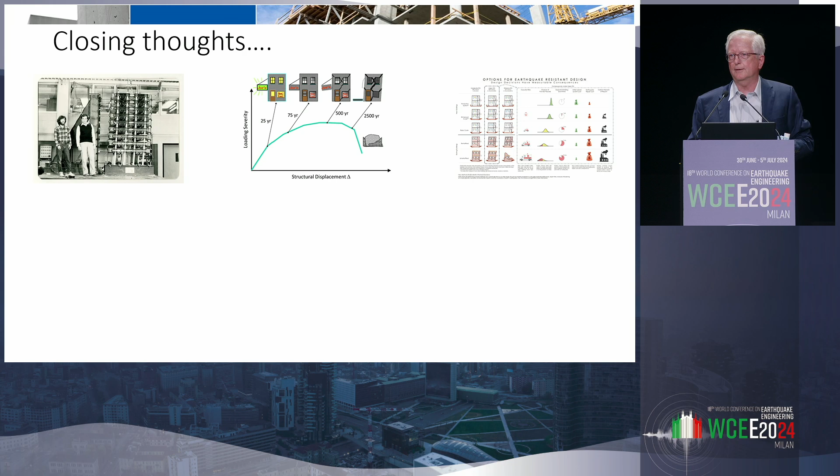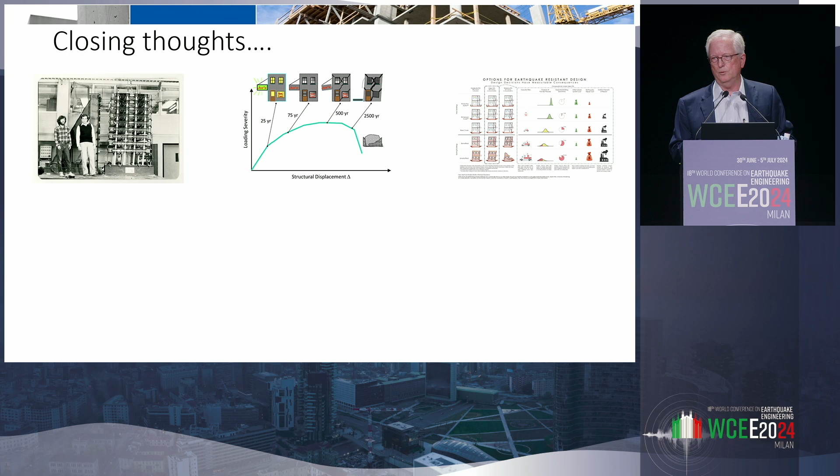The next set of projects that developed a risk-based approach to this performance-based engineering created a performance tool that could be used to study various kinds of design methods, new materials, new configurations, new seismic environments. Very flexible tool that allowed us to make statements about the risk of damage and consequences.

We, I think, have had an excellent experience in using these ideas to step outside the prescriptive provisions of our building codes and successfully design a series of buildings that are taller and more efficient than buildings we designed before. And it's important for us to use materials efficiently and to be flexible in our approach to design. We await the next earthquake as the demonstration that we're doing the right thing.

And I think then the final step, piece number 5, which I encourage many of our young people in the audience to really pursue if you're not already on this one. It's for the next generation for sure. But looking at functional recovery, repair, design for repair, and those kinds of topics.

With that, I thank you for your attention. We've got a marvelous set of tools at hand with performance-based earthquake engineering, and I think the promise ahead is really very bright. Thank you.